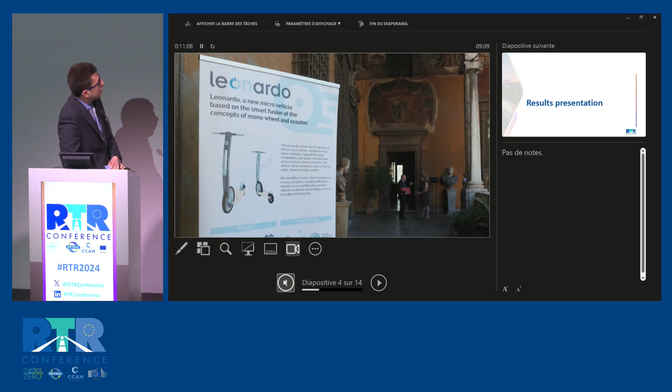We are in the first demonstration site. We see Rome, where we organized a conference. We have our project coordinator, Professor Dario, who explains some elements of the different prototypes that have been produced. We have the control electronics and the vehicle behind our colleague.

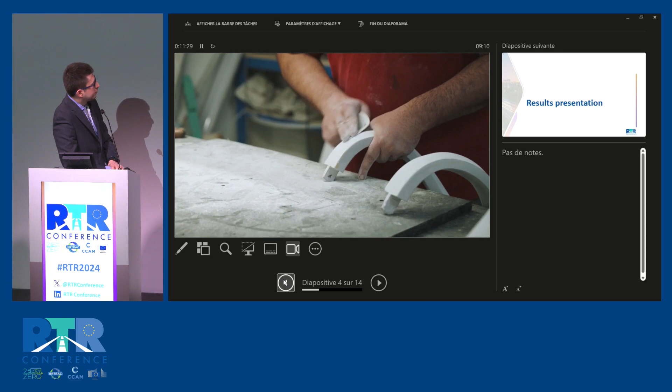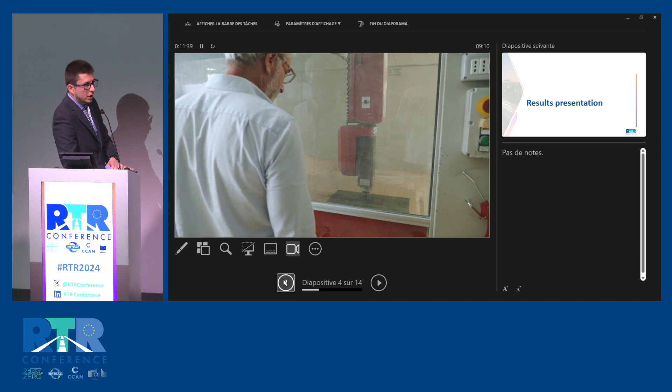Here we have the manufacturing process of the vehicle, which is fully in composite material, with processes derived from the aeronautic sector. We also can have a look at the different elements that are produced and the painting of the elements.

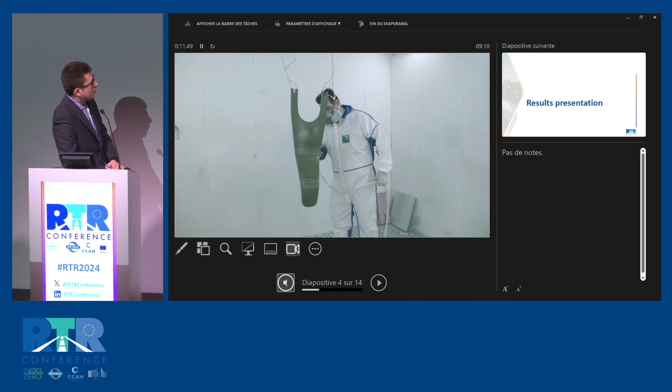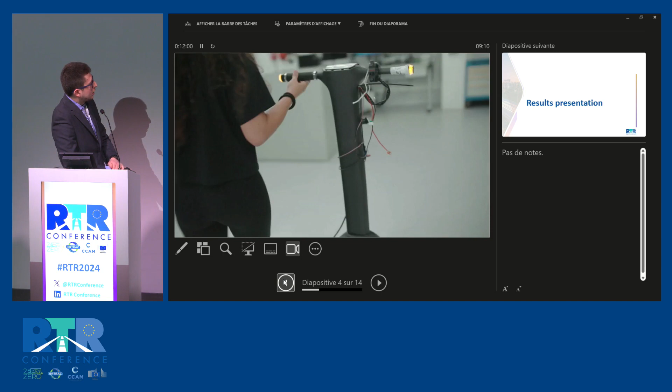Then we have also our colleagues from Spain at Technica, who deal with the testing of the vehicle's control. Our colleague moves in trolley mode and rides the vehicle in the facility, then pulls the steering column to brake, and once again shifts to trolley mode, then exits from the screen.

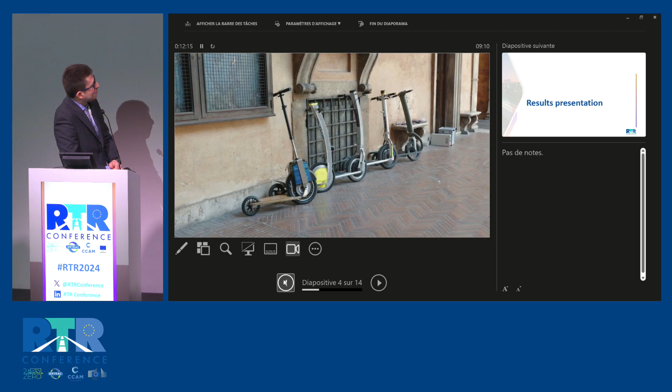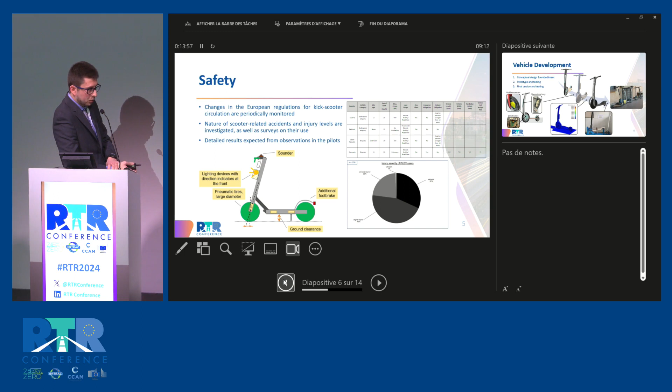This was what we wanted, not what we achieved, also because the price of components increased dramatically after the COVID pandemic. For example, the hubless motor's foreseen price before COVID of 500 euros shifted to 2,000 euros. So we had to try to find a more economically sustainable solution.

We derived a concept made in aluminum, which was tested from a numerical perspective on an experimental scale, but the real problem was that it was very heavy.

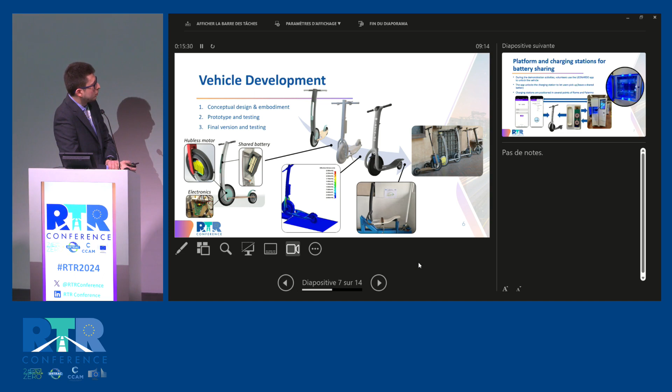Also, the platform and charging stations for battery sharing are particularly important in this project. As you can see here, during the demonstration activities, the volunteers use the Leonardo app to unlock the vehicle, but also to unlock the charging stations, which let users pick up and leave a shared battery that is wirelessly charged inside these stations.

These shared batteries can be included on the front of the vehicle that we have here. In addition, the charging stations are positioned in several points of Rome and Palermo as of now, but will also be in the other sites included in the project.

Regarding the demonstrations, we selected 2 additional cities to perform them, Madrid and Zagreb. We had a lot of work to prepare all the pilots in terms of logistics, such as where the kick scooter can be taken by users, or where the charging stations are positioned in the city.

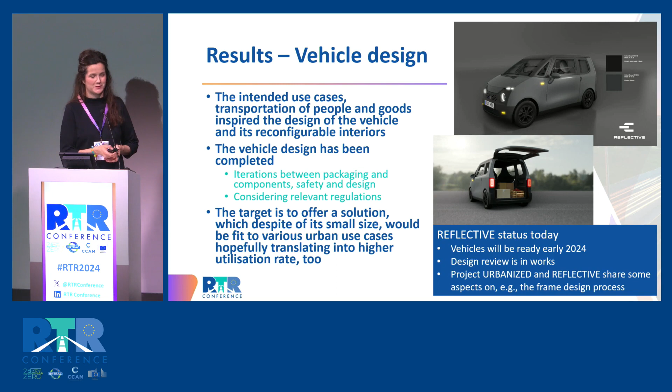If not, maybe some actions should be taken in the future if those features that we have found prove out to be very useful in the end. I also want to mention that we share some certain elements with the URBANIZED project, which is presented later on today. So this is also very good.

As I mentioned, structural safety is a very crucial element. A huge simulation campaign has been performed to meet the targets in the end. Here is one pretty nice simulation prepared by our colleagues from IDIADA. In addition to those simulations, we have performed the first crash tests in order to validate the models and tune them according to the actual crash test, to validate how the materials selected perform in real life.

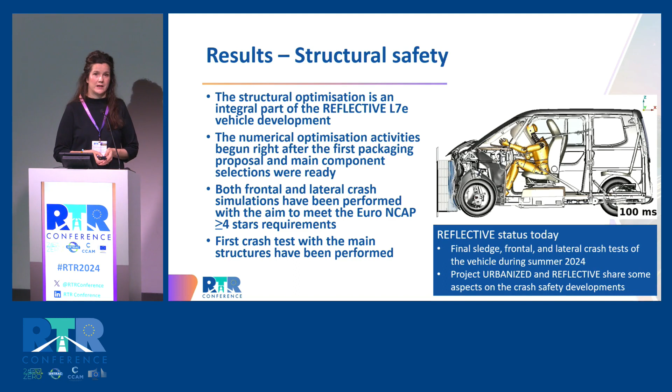Now, regarding the structural safety developments, the design has been completely frozen, and the vehicles are in works, in preparation. The final crash tests - the sledge, frontal, and lateral crash tests - will take place latest in summer 24. Again, we have had very good collaboration with the URBANIZED project on this matter.

Then about the powertrain - we did quite a lot of work on the powertrain as well. It was specifically designed for this vehicle, but we wanted to take into account how it could be scaled up a bit to a bigger vehicle, or a smaller one if you prefer. We did quite a lot of investigation of the appropriate voltage level, because we also have the wireless charger on board, and for that it's very good to pick up a bit higher voltage level in order to have good efficiency for the solution.

All in all, the powertrain comprises a battery, inverter, electric motor, and chargers, both conductive and wireless. We specifically did quite a lot of work on the motor development - the reflective electric motor has been designed and manufactured by the consortium. At the time when we applied for this project, we thought that's the component where we could maybe make the biggest impact given the budget and all the activities involved.

We also wanted to take a sustainability angle, so we didn't go for a permanent magnet, rare earth permanent magnet motor solution, but instead opted for an induction machine. This is both from the point of view of reducing use of magnets, but also because this could be quite a cost-efficient solution in the end.

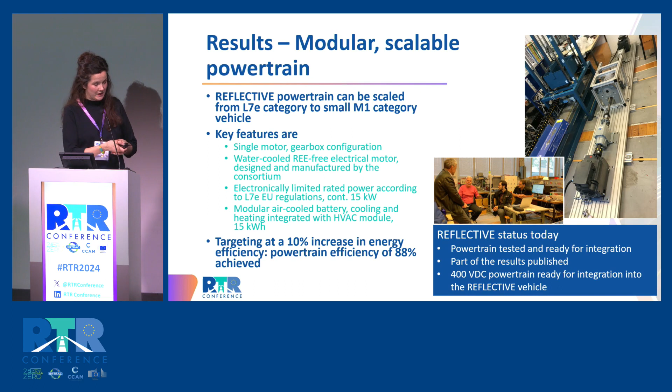This is the final slide on the results. Regarding comfort and usability, we wanted to explore what it could mean if we had not only the conductive charger but also the wireless charger, to cater to different environments and use cases. Especially with the wireless charger, you can imagine autonomous operations where you can easily park the vehicle at the charger, charge it without needing to intervene at all, and then drive away. Of course, this can happen in autonomous mode as well.

So for that reason, we wanted to explore autonomous driving in a limited manner as well - what it could mean if the vehicle is accurately able to park on the charger and then continue its trip to cater to some microbus operation, or whatever urban use case you want to cater to with an autonomous driving capable small vehicle.

So these are some aspects on comfort and usability that we want to explore with this reflective vehicle platform. And I'm happy to say that the charging system as a whole, as I mentioned already, has been tested, and also the autonomous driving system is ready for integration.

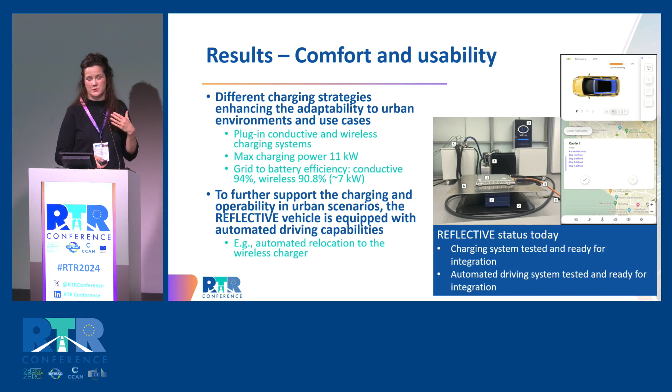And then I will go towards my last two slides. Indeed, the vehicles are in the works, and we have not yet had the chance to do all the demonstrations we are planning, but we are approaching that point with the project. As I said, we have the crash test, the controlled measurements at the chassis dyno, and the autonomous driving tests in VTT premises and areas in Tampere, Finland.

And then we also have quite interesting demonstrations in the cities. In Helsinki, we were able to engage Posti, a big delivery company operator in Finland, to test the vehicle in the newly built area of Kalasatama. Posti will take the vehicle in use for a couple of weeks, using it for postal parcels and later for some package parcels. I wish that we will get an industrial, commercial operator perspective of the vehicle - how they perceive it, whether it was useful, and what kind of benefits there were. This is a very exciting opportunity, I would say.

Then we have the shared usage of the vehicle by AVL employees in Regensburg, Germany. Of course, because this is not a fully homologated vehicle, we cannot just give it to anyone, and keeping this in mind, we had to prepare some meaningful demonstrations for the vehicle. So we have the commercial demonstration, and then the project partner demonstrations.

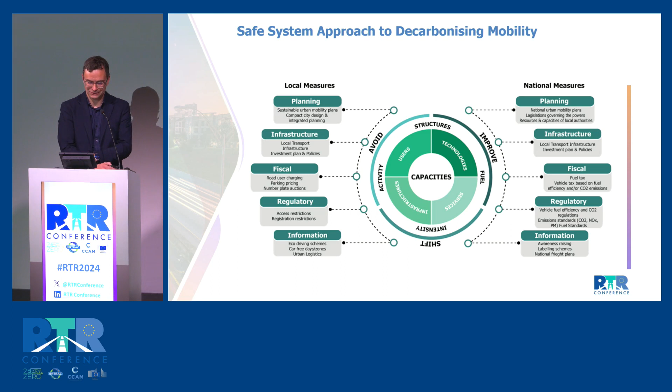As a key element to that, we look at the heart of it as the capacities from the perspectives of the urban planners that need to build them into the system, and the public transport operators that need to integrate the services and the various vehicles. It doesn't really make sense to just bring in the technology and then hope this will emerge and sustain. So a whole focus on the capacities and sustaining those is a critical element. At the local and national level, we also reflect back into the local and national policy and planning perspectives, and I'll touch on that when we dive deeper into each of our cities.

So we take a step-by-step approach. We started off with sharing information on all the e-mobility solutions out there, and then inspiring local entrepreneurs, local authorities, and public transport operators with examples from others who have succeeded with those solutions. Once we did that, we grasped the first ideas and brought them together in a comprehensive package. Then we bring together a partnership of local entrepreneurs, public authorities, civil society, and local knowledge institutions to implement the demonstrations.

So we test the vehicles that are being developed, we co-develop the vehicles. It depends a little bit on the development stage at which we are. Sometimes we start at the very first idea of the vehicle, sometimes we have the vehicle and continue with the services and the integration of the services. Once we've validated the service, we focus on the big impact, the scaled up project that can really make a transformative change to the transportation system.

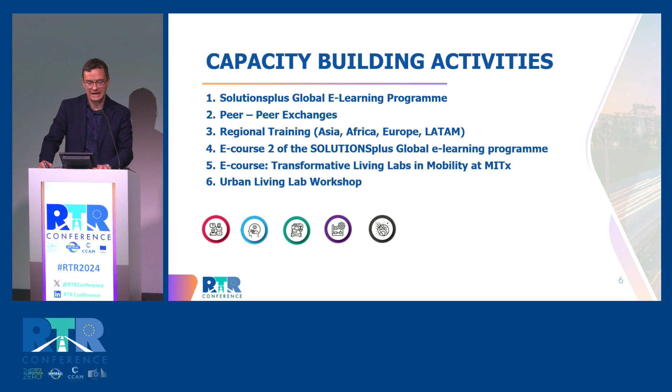So we had a couple of milestones as we ran through the project. We started with the e-mobility toolbox, which is our knowledge repository, which will continue long-term with our sister project run by the Global Environment Facility. And our capacity building activities were a starter in the program where we nurtured ideas and lured people into e-mobility solutions that can make a transformative change. It also helped us throughout the project to go back and forth on the different solutions we're testing, on creating the capacities to take up the solutions, and later to get the grips on the scaled up solutions being taken forward by local partners, not by us.

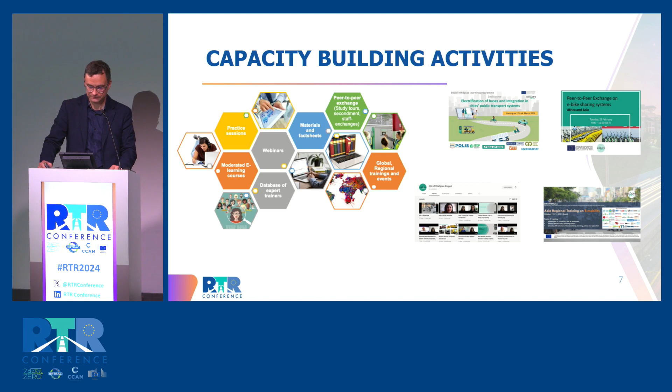So we had different formats of the capacity building activities, and all of this was centered on the demonstration activities - quite a diverse mix of cities. So let's start in Asia. Maybe here just some examples of the demonstrations that we have.

And here also the feedback loop to the European industry - of course it's a 2Zero partnership project here, so we would like to have also some feedback loop to that. In this case, our friends from Tojo Motors received the powertrain from Valeo, and they managed to develop the battery management system and the controller, etc., all locally and integrate that.

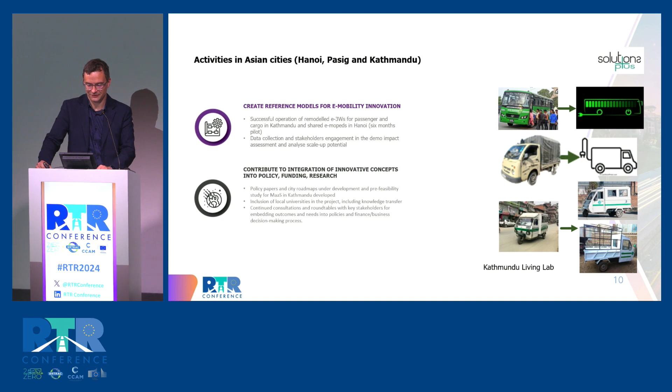And we also realized that the policy environment in Nepal is actually quite favorable with regard to the import of electric vehicles. However, from our perspective of creating an e-mobility industry in the country, it was not so, because for the components you still pay a lot of import tax and extra costs. So an important feedback loop also to the national policy level - if you want to make local industry work here, you need to adjust the operating environment quite a bit.

These are the reflections that we have from the demonstrations, and they come in various sizes and forms. In Latin America, cargo bikes were a recurring feature in Quito and in Montevideo, for example. The vehicle you see here integrated a newly developed package around the powertrain from Valeo that included basically all the components vital for capacities similar to the case of Pasig. So it includes a controller and key other components that make it much easier for local entrepreneurs to take up the solution.

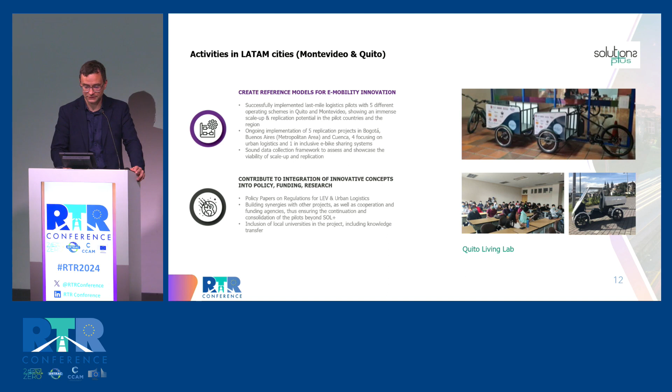The vehicle itself is quite advanced, the battery, the powertrain, but then there are some components that only emerge once you test that. For example, small changes to the life of the woman driving the bike and the woman using it - if you just slightly adjust the seat, it's slightly more comfortable for both the passenger and the driver, so they don't get too cozy with the passengers. That's a small element that emerges alongside many others.

Bike sharing is happening in Kigali, servicing the public transport. We're also taking some of the bikes further into the outskirts of Kigali, where they are used as bicycle taxis, which, as you can imagine, is quite hard work to use a normal bike as a taxi.

So an e-bike is quite a welcome contribution to that service. In Hamburg, we tried to turn around a service that's considered a nuisance every now and then - kick scooters - where they are being used in the outskirts of Hamburg to service the metro lines, which has been quite a successful case.

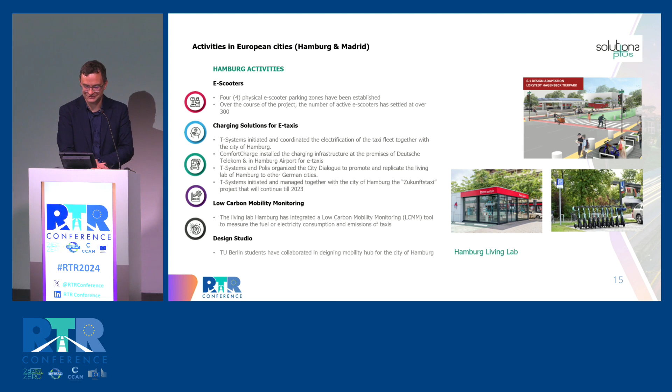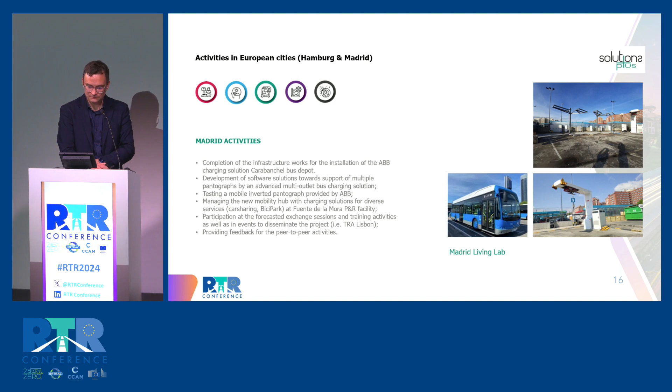And also on the incentive scheme that was behind it, a high-speed charging solution that has been tested in Madrid, Spain, that boosts the efficiency of public transport operations quite a bit. So lots has happened in this rather vast and diverse project.

Our investment into the capacities will take us further, well beyond the lifetime of the project. So we are integrating all of our learnings into local knowledge hubs. We've digested all the learnings, the blueprints, into knowledge products. And the impact assessment in particular was a critical element already from the beginning, where we co-developed the KPIs.

Together with the local authorities, so with the key partners that also need to take the solutions further. Sustainability can address a lot of objectives, but it was critical for us to identify the key objectives they would like to address, and then adjust the service, the logic, but also just the language that we're using in the design of the project.

So sometimes it comes from a safety perspective, sometimes from a climate perspective, or from an accessibility perspective, and we provide the right language, support and evidence to that, so that the policy dialogue at the local, national, and international level can be supported by that.

So from those first demonstration projects, we had another 20 replication actions that were being initiated - other entrepreneurs in other cities taking up similar solutions, learning from their peers, also sharing the good and the bad and the challenges with them to make it easier for them.